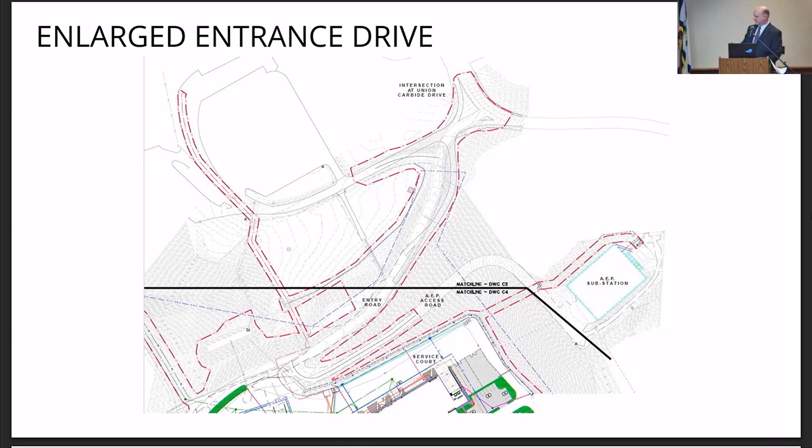The next slide is basically our site plan as it sits right now. You can kind of see this entry road coming in, and there's a little loop that comes up, and a driveway leading up here that says AEP Access Road. That's an existing access road that AEP has back up to the hill to work on their substation. What it does is it creates kind of a little mound right here as it goes up, a little hidden, tucked-in spot right here.

But when you come around the building from down below, we come through a guard shack here that is going to be the first security point for this complex. It's going to have a couple of lanes for visitors and basically the occupants of the building. This site is set up very simple, where we've got a large parking area in front, the building in the middle, and then our security court, service court, in the back.

And that way trucks can loop around the perimeter, get back into this gate, come into the service court, do what they need to do, and then exit the site without tangling with any occupants.

The entrance to the building is right here in the front. The building is oriented due south, which is a good orientation for some of the topics I'll talk about regarding sun angles. This building is 288,000 square feet, which is just a little over half the size of the West Virginia State Capitol—about 55% of the Capitol.

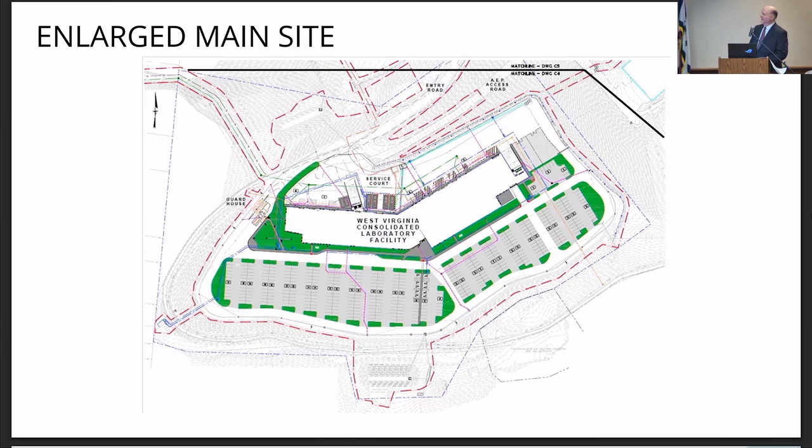This floor plate here is about 80,000 square feet. The floors that rise above it are about 65,000 square feet. So we have a very, very large building.

Speaking of the site, here's the update on the timeline for the site package. We bid this project and received bids in November 2024. K&N Contracting was the low bidder. This is basically a minimal site package because the site is already well prepped, though we had to do some site grading and start some utilities and other site preparation up at Tech Park. That project will be about a 180-day duration.

Strangely enough, the notice to proceed for that project goes out today, so they'll be on site beginning work. Their substantial completion date is in December, right before Christmas, putting final completion at January 21st, 2026. Remember that date, because later in the presentation it coordinates with our timeline moving forward on this project.

The next few slides are some of the floor plans for the project. There's not a lot here other than showing the length of the building and the complexity of the floor plates.

Over on the side you can see weights and measures, and all the accessioning and storage for the Department of Health. A lot of the white area in the middle is our building services—loading dock, mechanical, electrical plans. The purple area is the first floor of the Office of the Chief Medical Examiner for the State of West Virginia. This blue area in the back is all the first floor amenities related to the State Police Forensics Lab.

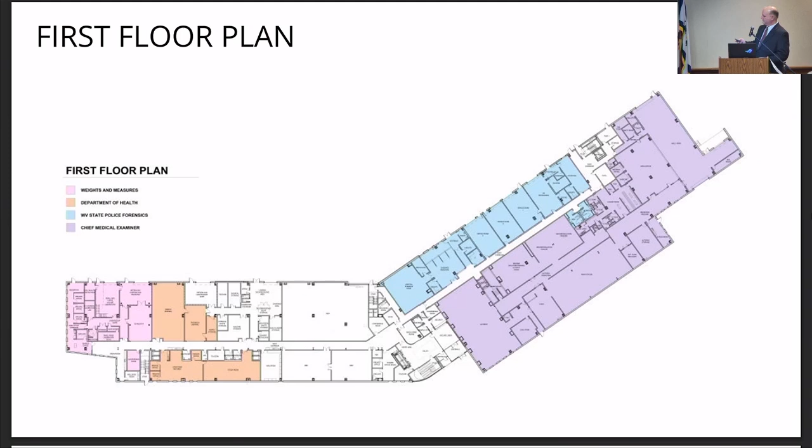As you move up in the building, the layout becomes very simple and straightforward. We designed it with a middle core we call the Valley, after the Kanawha Valley—it's our hub and lobby in the building. Each wing is called the West Wing and the East Wing. On the West Wing we have all the Department of Health areas, and on the other side we have the office space for the Chief Medical Examiner.

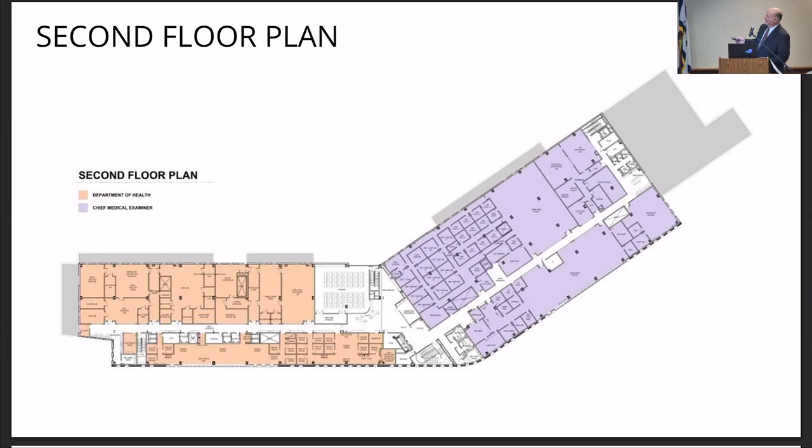They do have one toxicology lab up here, but they have about 120 people just on this floor area. If you move up in the building, you have the same layout of the main corridor coming down the middle.

That corridor divides the building in half with the lobby in the middle. The building faces due south, so the back faces due north. That's great because we can control the sun with the building design and window blinds on the south side, which also offers a wonderful view over the trees toward 119.

The backside of this building is all facing north. We wanted to make sure that all the laboratories had great north light so they can basically leave their blinds open all day without getting any direct sunlight into their space. Lots of windows along the backside. It's going to be a very nice space for them to work in.

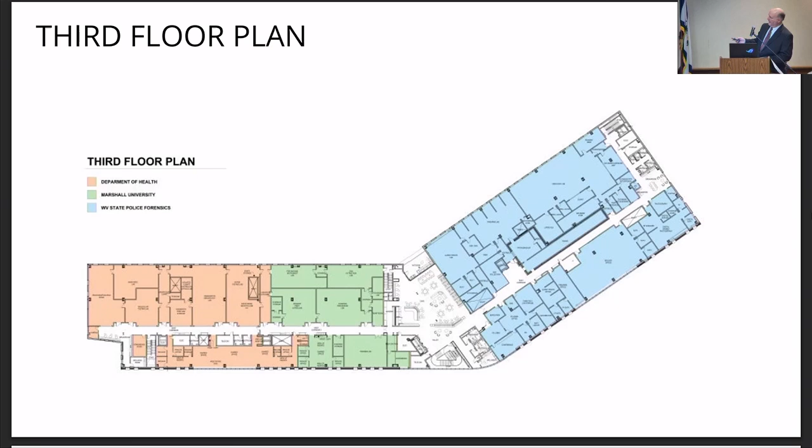Moving up to the fourth floor - well, hold on, let me back up one slide. I wanted to make a point that Marshall enters the building here on the 3rd floor, right beside our cafe that we have in the middle. You move up to the 4th floor, you have the BSL-3 labs for Department of Health with their office space across the hall. And then we have WVU here in the middle, and we have a smaller lobby on this floor. Then this entire floor here is all labs for state police forensics on the north side and office space on the south side.

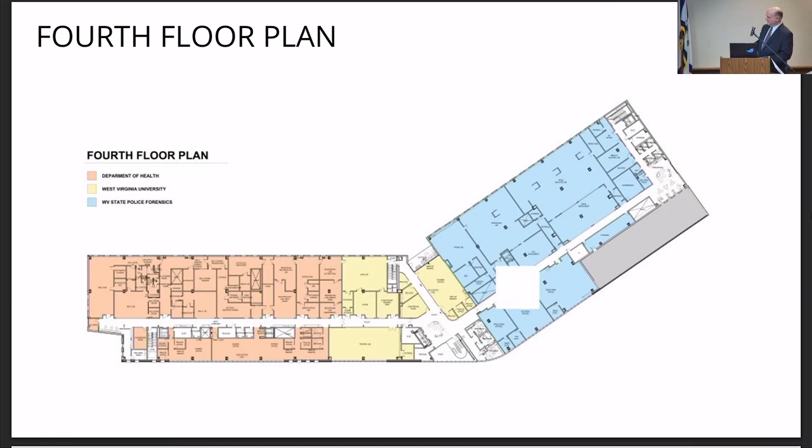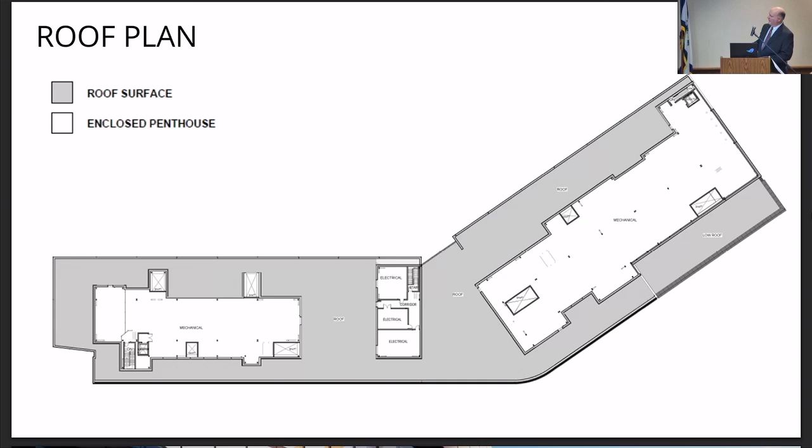Now, the next slides we're going to look at after we look at the penthouse. This penthouse, we've got an east penthouse over here and a west penthouse that's basically serving only that wing of the building, with a little central penthouse where we have all of our electrical. So we've got a large penthouse over top of OCME and forensics. Each one of them has stairs and elevators where you can bring equipment and stuff straight up through the elevator.

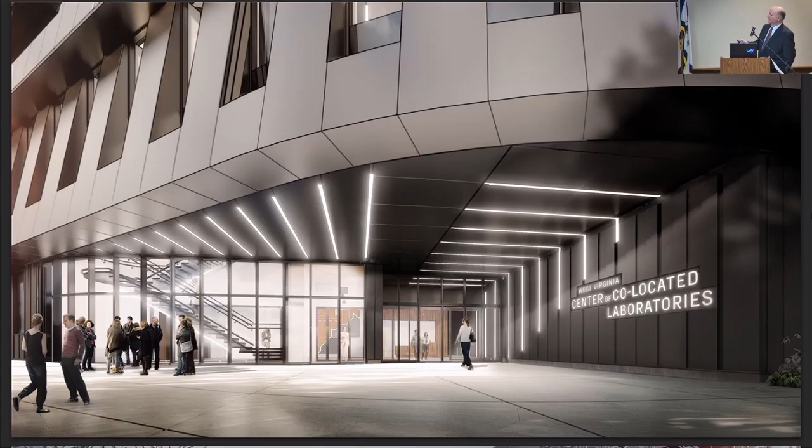This is a detailed look at the main entrance. We have this building designed for about 450 people, and most of them are going to come in at possibly 2 or 3 different entrances and exits throughout the building. But this is the main entrance where the majority of the people come in.

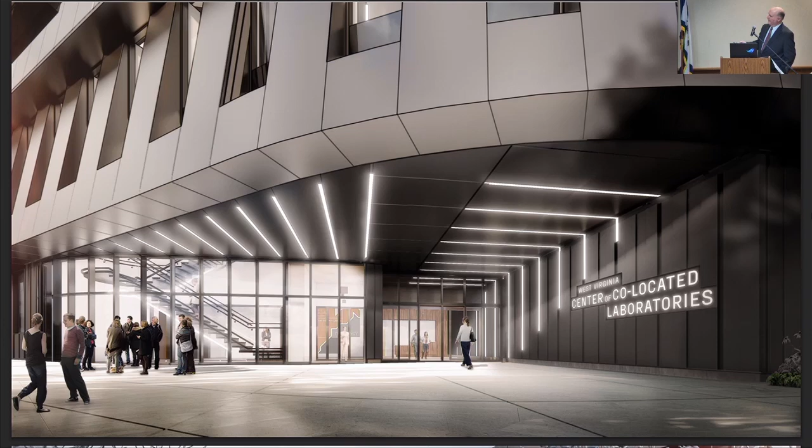This side over here, probably from about this point, is the monumental stair that goes up through the building that you can see from the entrance. But the staff entrance is right here. Once you pass this black column, everything to this side - we're using the light to kind of funnel people into this larger opening - is going to be the visitor opening. Behind that wall, there is a secure lobby with bullet resistant glass and bullet resistant glazing at the reception desk. And right behind this wall, there's going to be a door that will allow them to leave the secure lobby and go into the more public lobby for the building.

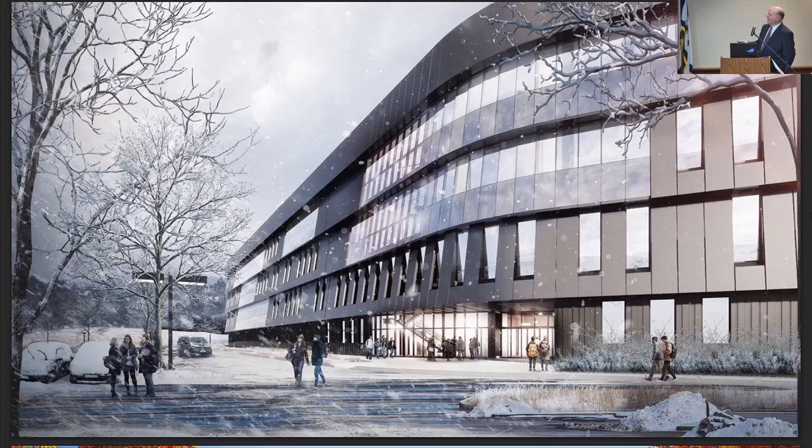This is an interesting shot that shows the building in the winter months. You can see the slick metal panel and the glass and glazing that looks smooth, just like the metal panel, with the individual punched openings, and the lighting underneath the overhang that will represent the stair and the entrance.

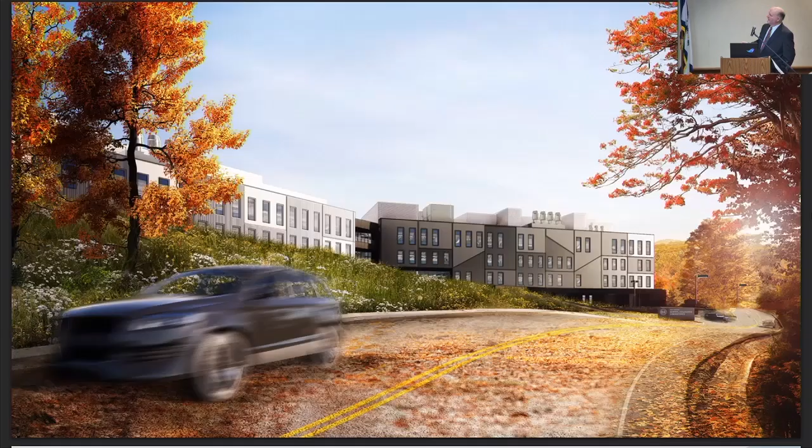This last shot is of the approach, the exit and approach to the building coming up the hill from the tech park, where you see the back of the building, with the metal panel organized left and right for the corrugations to allow a lot of light play. You can see some dark lines in between. We've trimmed these out to separate them, providing a quilting pattern on the back, just to give it another level of detail.

As you can see, there's no slick metal panel back here, no long sections of curtain wall. These are all punched openings because they're windows that go directly into each of the labs. The labs need that wall space for their cabinetry and equipment, so it works out much better to have these smaller windows with areas in between, some of which are large where they have their equipment.

They're currently in General Services' hands, reviewing them, and will provide us with comments. Once we get those comments, we'll determine how long it will take to put those together, and then set a date to work towards. We're holding a tentative date of sometime mid to late August to have that activity complete.